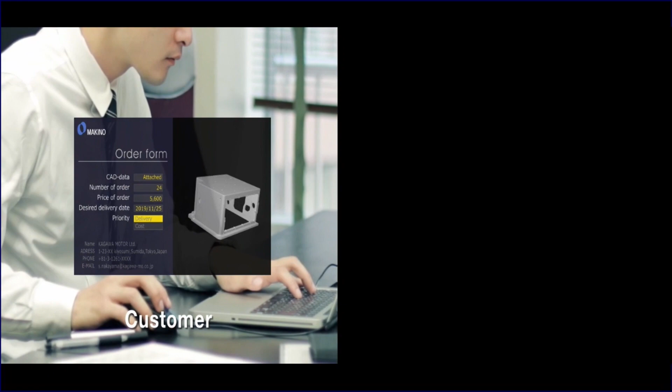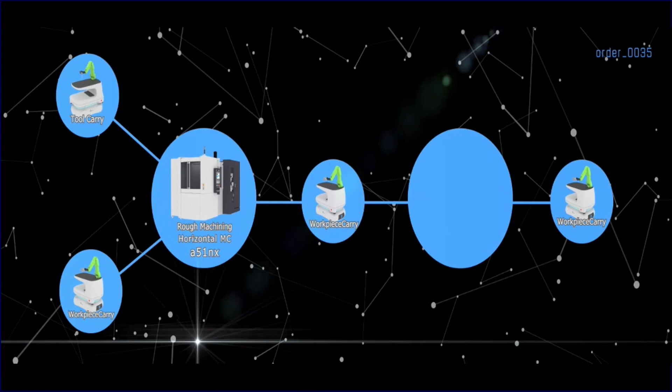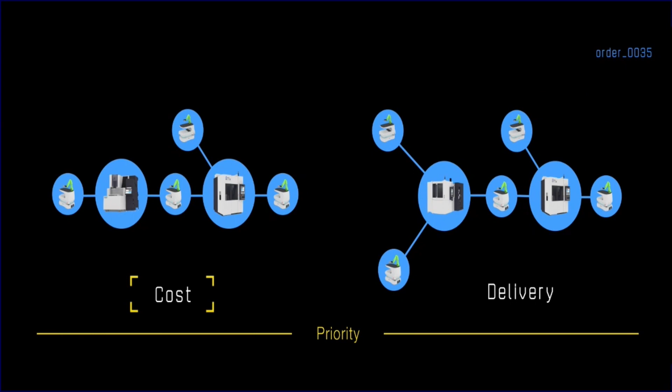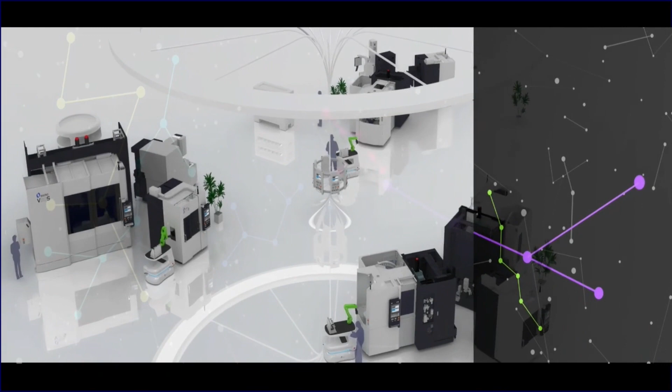So, what can Makino suggest to improve efficiency in your facility? This is our suggestion. The system alters the daily schedule in real time to maximize the factory's overall capacity. You may think this is futuristic, but artificial intelligence changes and analyzes the schedule and chooses the best production method one by one.

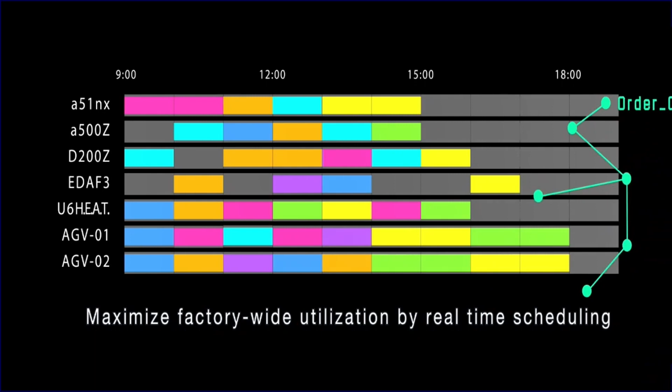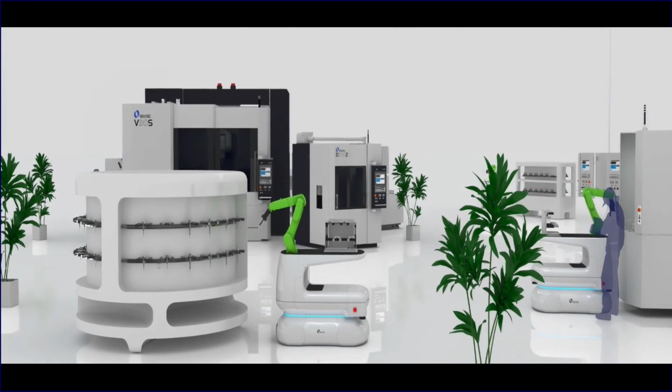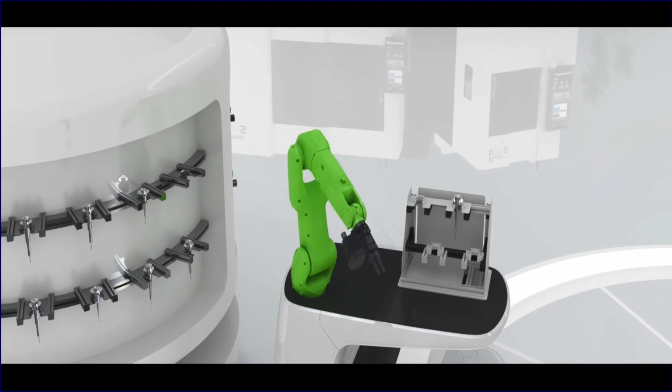For example, after the production system chooses the best way of manufacturing, the robot with AGV chooses the best tool from the tool database, then automatically puts these tools into the machining center. Such simple labor is replaced from human to robot. Not only tools, but workpieces are also delivered by this AGV.

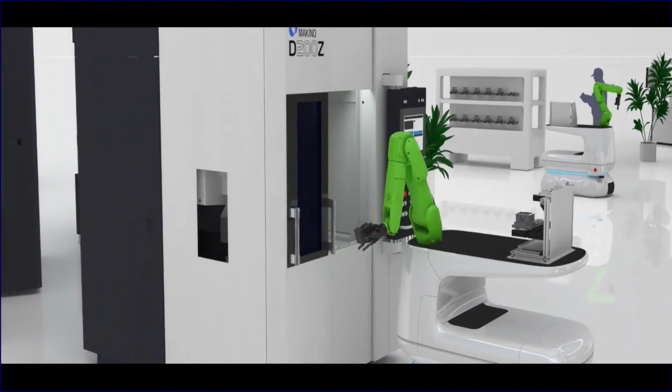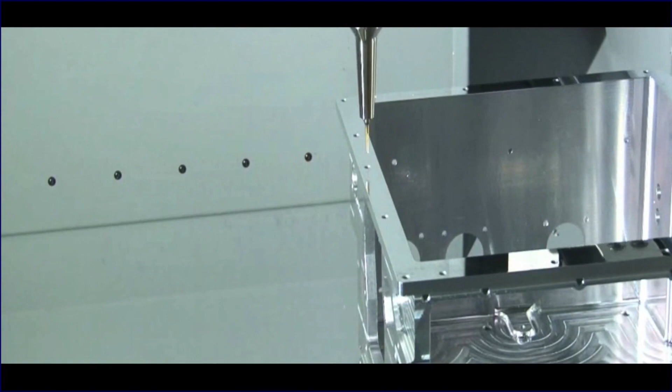If you have old machines which do not have an automation door, do not worry about that. The robot opens the manual door, then sets up the workpiece. We recommend using 5-axis machining instead of 3, because single chucking solves every machining step in the process.

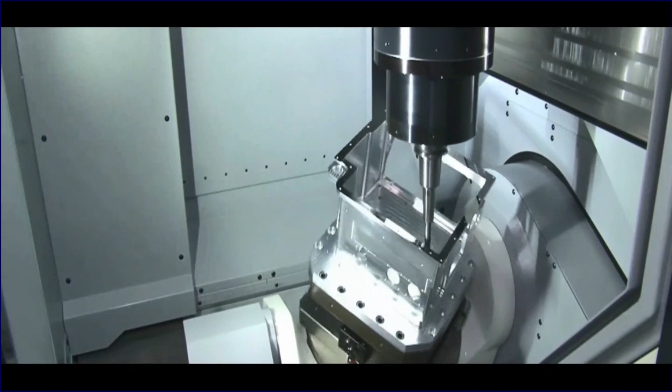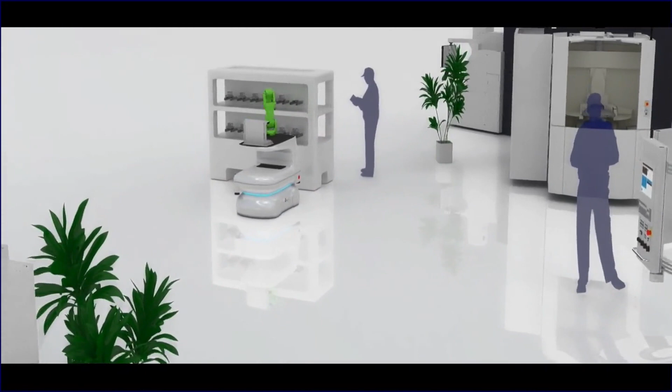This is Makino's target and future of production maximization. We are working day and night to introduce this system to customers. The system is not released yet. However, we keep working to meet the customer's demands. That sounds like a very futuristic and vast theme, but this is the Makino MES concept, a production system against understaffing.

Here is the second theme, automation. I made a subtitle: Inside Machine Measurement Enables Consistent Long Time and Precise Machining. The most important point of automation is not introducing robots and AGVs. The important point is that the machine itself can detect when the machining is properly done.

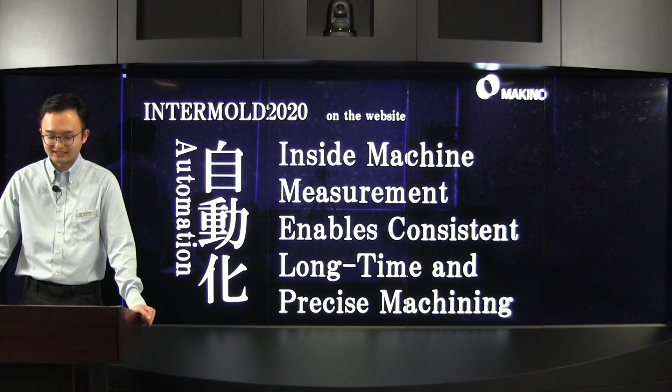So I would like to explain milling operation, sinker EDM operation, and wire EDM operation. For these three machining types, I'll show how Makino suggests the method of inside machine measurement. First is milling operation.

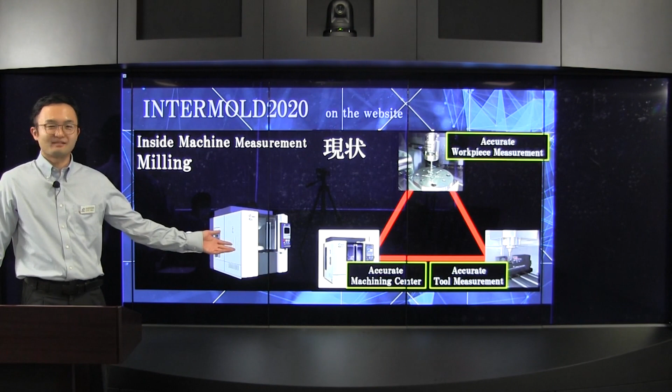This is the iQ500 micro machining center. This is a very accurate machine, able to achieve plus minus 1 micrometer accuracy. Not only the machine, but also a workpiece measurement system and tool measurement system are provided as options to secure the machine's accuracy. However, there is a problem.

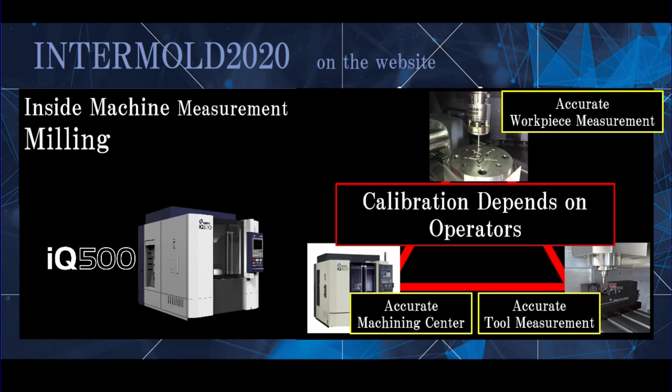All these three machines and devices' calibration depends on operator labor. So some operators may hesitate to do that, because all the responsibility for accuracy rests on the calibration. Some less skilled operators don't even know what calibration is. So we are thinking about how we can automate this calibration.

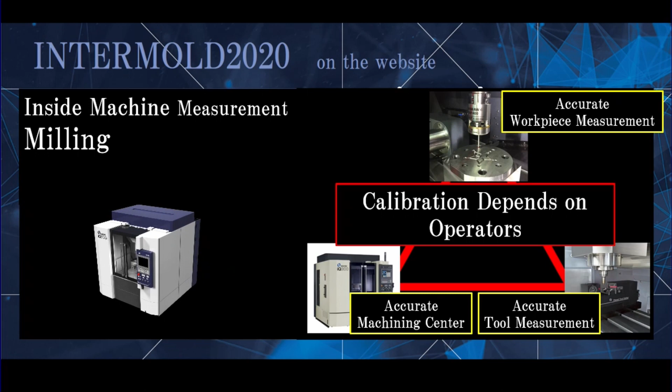Here is the automation of calibration. You can see the sphere is attached on the table, and a sphere is attached to the sensor to detect where the center of the workpiece measuring probe is.

As I said before, some operators may hesitate to do the calibration because it takes lots of time and skill to achieve high accuracy. However, Makino developed software and hardware which enables calibration of all the devices with a single button press.

But calibration is a very necessary step to achieve plus minus 1 micrometer accuracy. So it should not depend on the operator's skill. Therefore, Makino developed its own technology to automate this process.

Now the machine changes the tool. Then the tool measurement device detects the center point of the tool. Therefore, the machine can detect where the center point of the tool is, to achieve plus minus 1 micrometer accuracy.

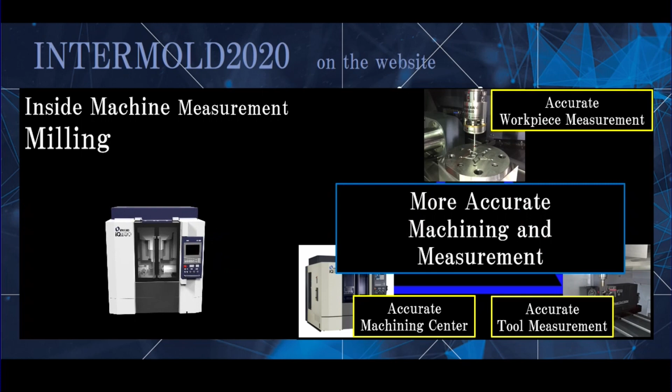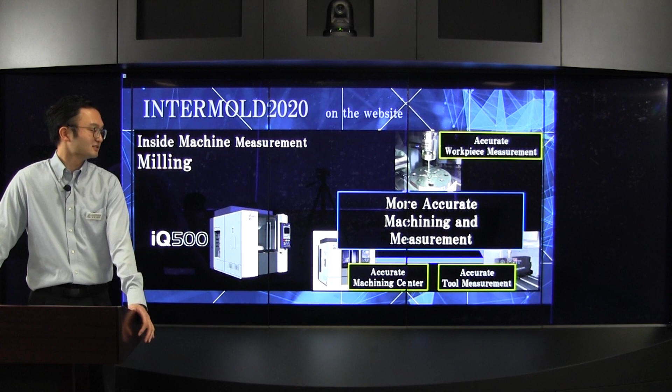Now you can see this blue triangle. After automating the calibration of the workpiece measurement device and tool measurement device, it enhances and extends the performance of accurate machining center. So you can realize more accurate machining and measurement.

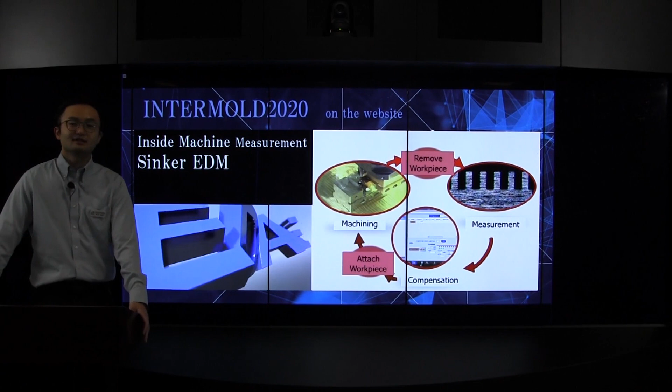The next one is sinker EDM. This is our small sinker EDM, EDAF3. Especially this machine is popular for the connector die industry, which requires very severe pitch accuracy.

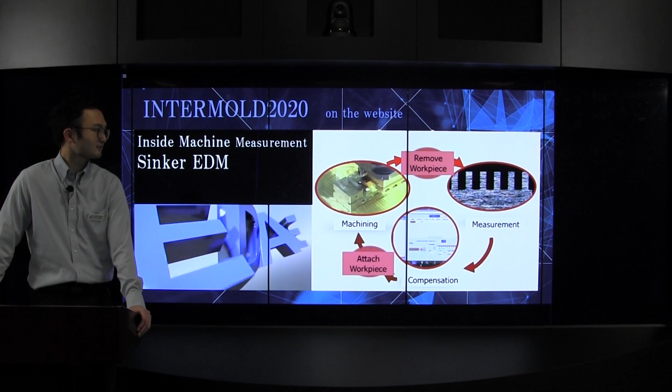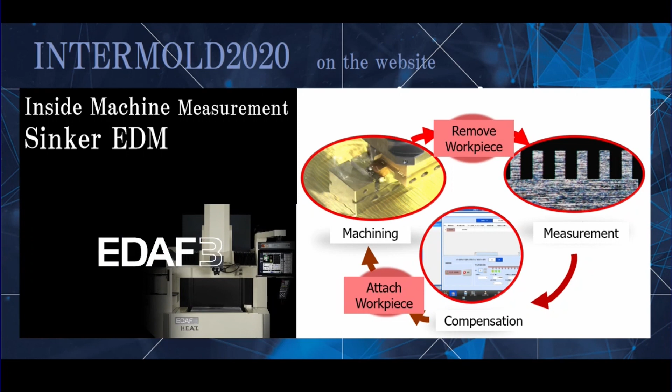However, this machine has a problem. After machining, before the final finishing of 5 micrometer depth, the operator stops the machining, removes the workpiece, then measures how much more to machine. Then adjusts the arcing setting depending on the operator's skill, then resets the workpiece, then machines again. After repeating this cycle, it takes lots of time, and the skill depends on the operator.

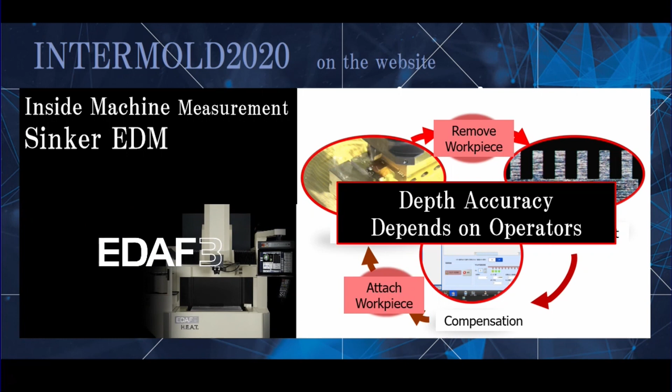So how can we realize consistent depth accuracy?

This demonstration shows how Makino's machine detects the depth accuracy.

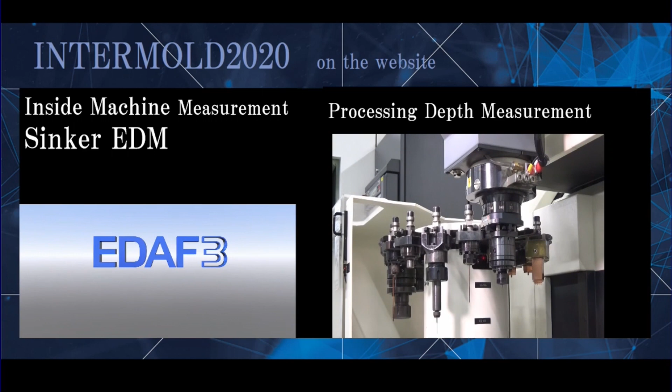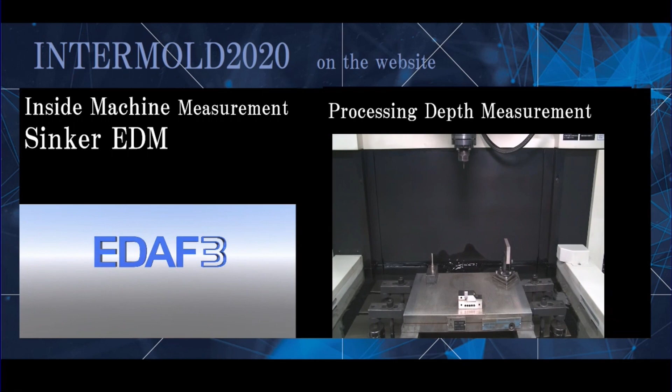For example, the connector die only has 0.3 or 0.5 millimeter pitch on each peak of the mold. Therefore, the machine forms the probe by itself.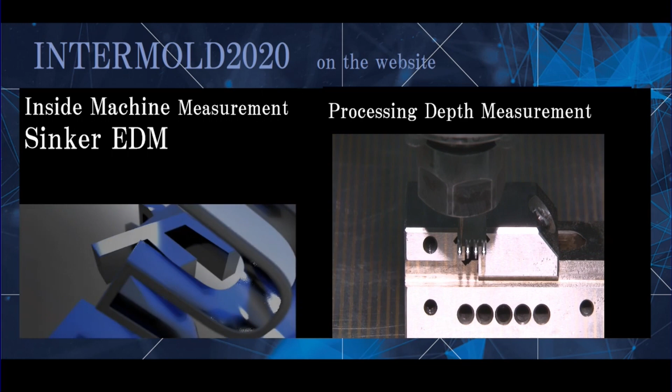You can see that this probe is approaching the workpiece. It is a very, very small diameter probe. Because this is sinker EDM, it is not necessary to be physically contacted to the workpiece. If there is physical contact, the probe easily breaks off.

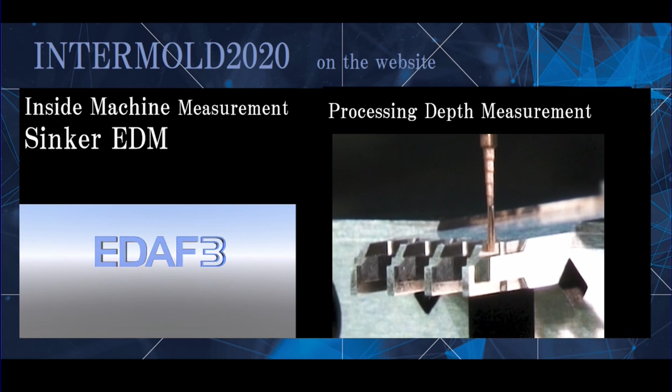Once the machine detects the conducting of electricity, the machine automatically detects how much depth is left to reach perfect condition.

After detecting how much to be machined, Makino has experience with slight additional machining. So if 5 microns or 3 microns are left, the machine automatically detects the value, then optimizes the setting to make this additional machining.

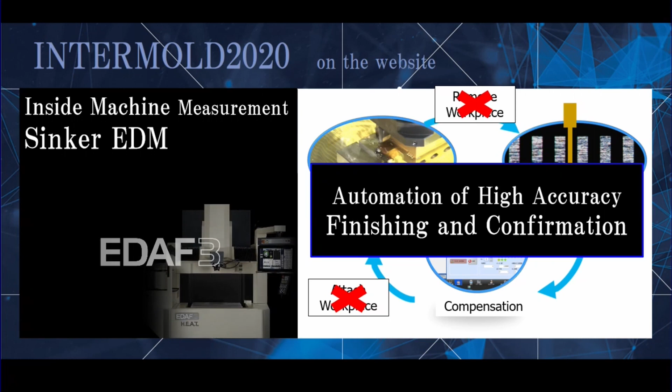So you do not have to remove the workpiece one by one, and you can leave the final machining to this sinker EDM. Therefore, automation of high accuracy is realized. Then the machine automatically confirms whether the workpiece machining is done or not.

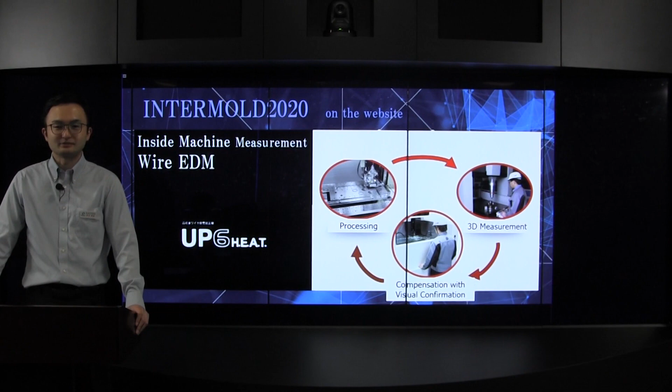Finally, I would like to explain about the wire EDM machine. This is UP6 H.E.A.T., a very accurate machine that can aim for plus minus 1 micrometer pitch accuracy.

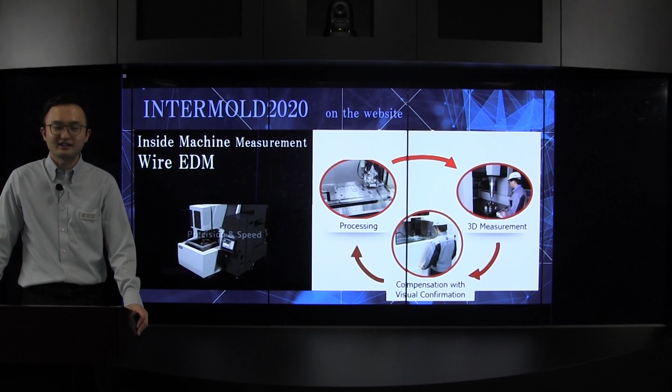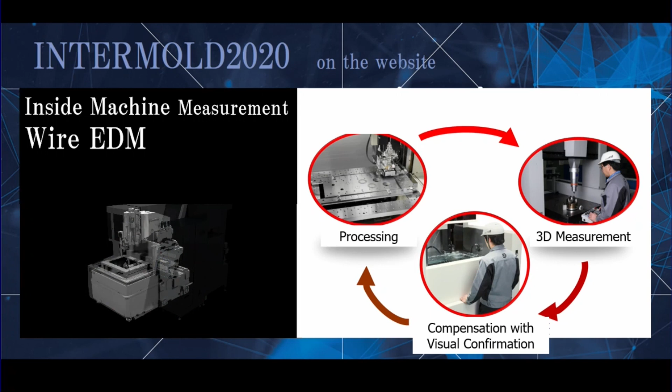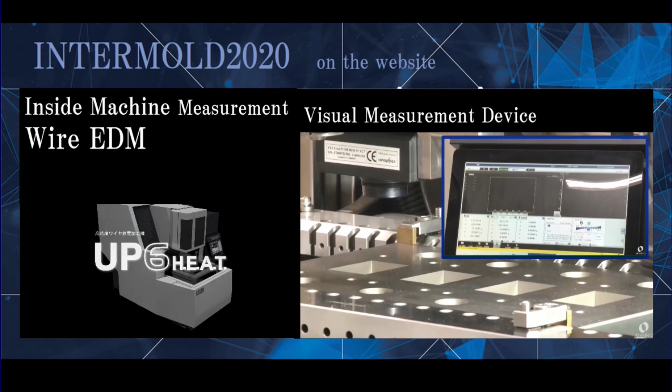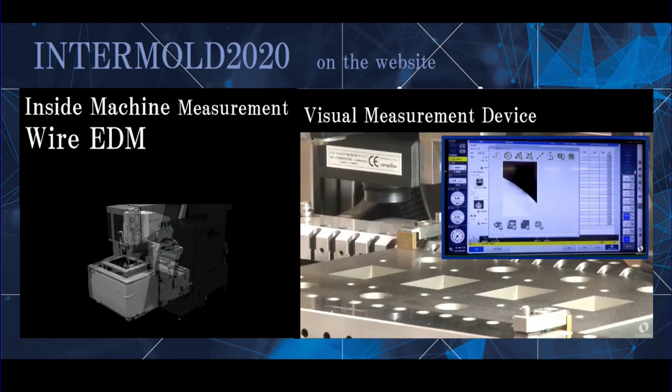So how does Makino eliminate this manual adjustment? There is a visual measurement device attached to the machine's head, and the machine head moves the same path as the machining. The reason we use a visual measurement device is that sometimes the workpiece pitch is too narrow, so the workpiece measurement probe cannot get into the space.

This is why we adopt this visual sensor, and as I said in the sinker EDM section, we have a technology of slight additional machining. So once the detection device tells there are 2 or 3 microns of additional machining needed, the machine automatically adjusts the condition, then does the rest of the job.

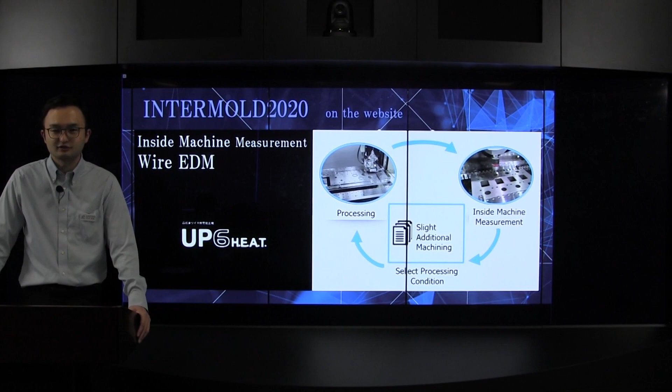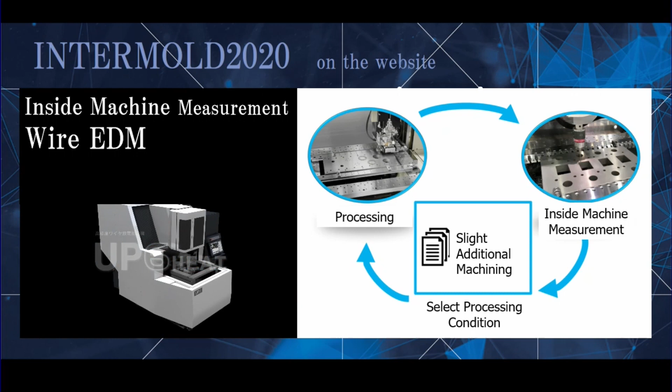So here is the cycle. You do not have to remove the workpiece from the machine. Inside the machine measurement, on the picture there is a probe, so you can select whether to use the visual image sensor or the physical contact probe. Then, after detecting how much more needs to be machined, the machine automatically selects the best condition to make slight additional machining, then finish the workpiece.

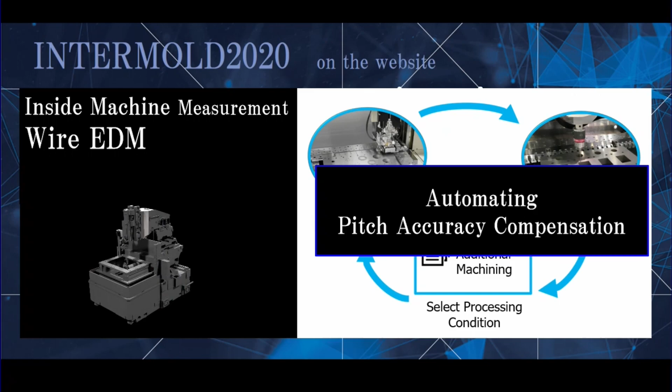So I introduced the automation of 3 machines in terms of inside machine measurement.

I would like to introduce the last theme, facilitation. No matter how we introduce the automation system, the final user of the machine is human. So we always think about how we can make easy and friendly machines and technology as a mold-making tool.

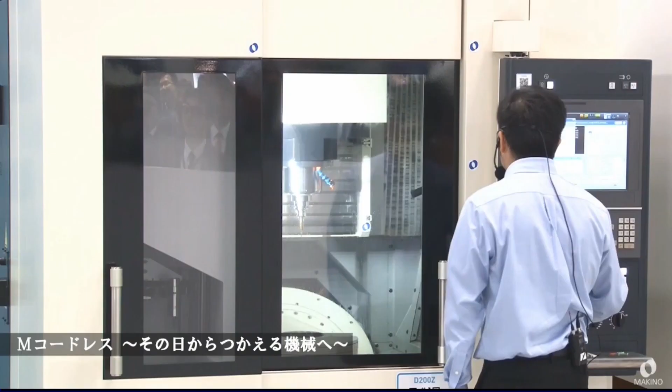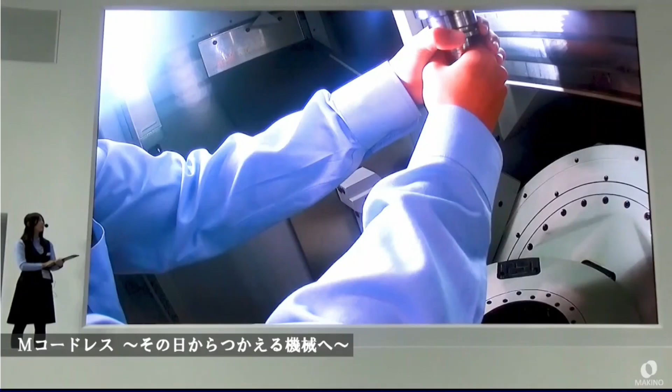This is our latest technology called Athena. You can see the demonstration of voice control. The operator tells the machine to unclamp the tool. Then the machine unclamps the tool.

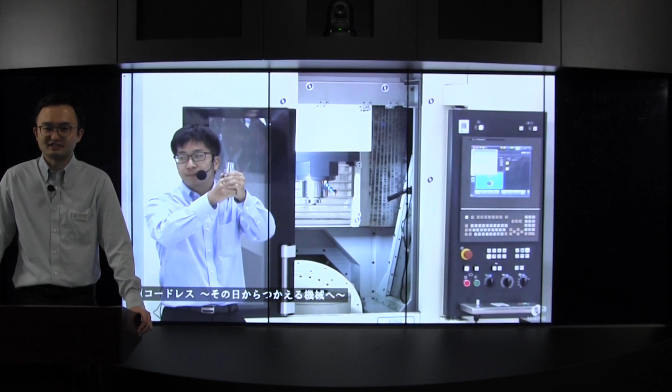Even if the operator's hands are both occupied, you can manipulate the machine with voice. Not only voice commands, but Athena also tells the operator which items need to be set up. Especially for beginner operators, it is much easier to manipulate the job before pressing the start button.

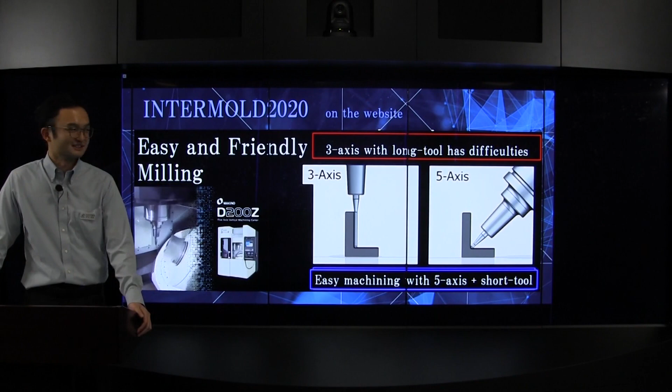Next is the 5-axis technology. There are lots of difficulties with 3-axis machining. The tool can be very long in this case, and the surface finish will be bad because of chattering, and also tool life becomes very short. So we recommend using the 5-axis machine, which can tilt the tool to realize better surface quality.

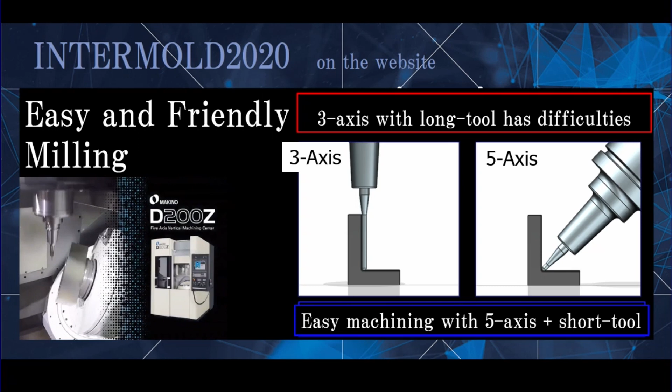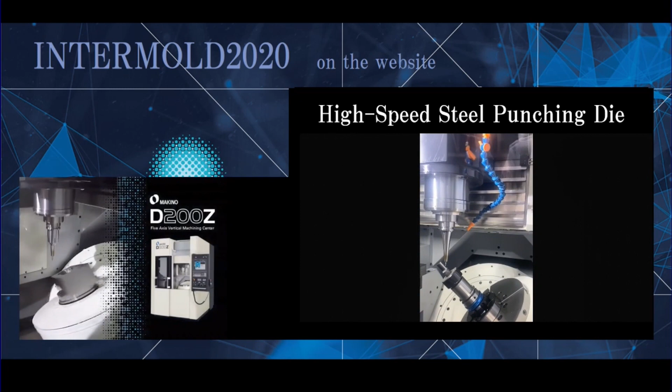Also, the 5-axis machining makes your job easier. For example, this is the video of D200Z, our vertical 5-axis machining center. What the machine is making is a high-speed steel punching die.

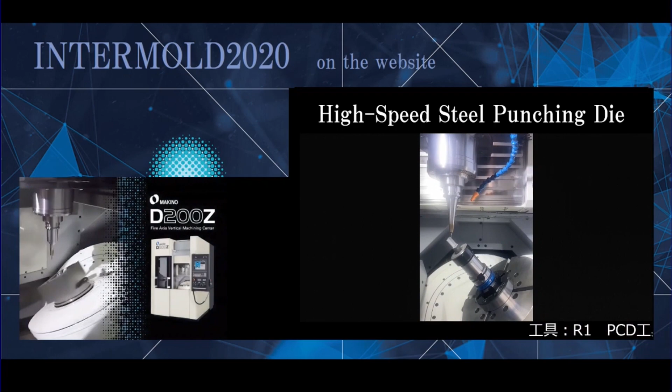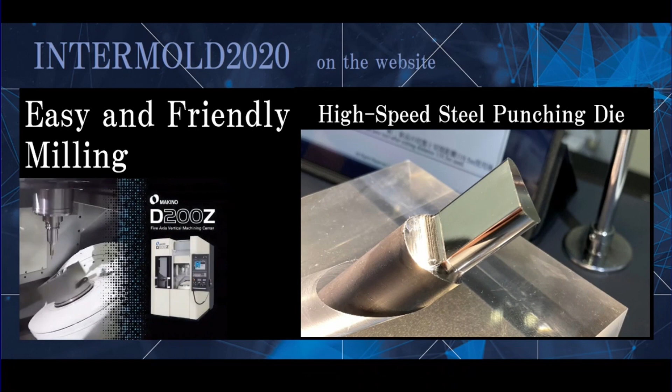The workpiece is 60 HRC, and the workpiece size is 20 by 100 mm. The tool is a PCD tool, sintered diamond. This combination realizes a very beautiful mirror surface finishing on the punching die.

It is almost a joke to make the same workpiece with 3 axes. So 5-axis machining expands your possibility on the job.

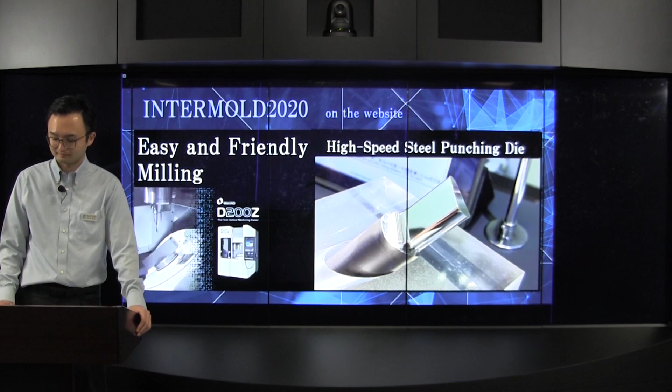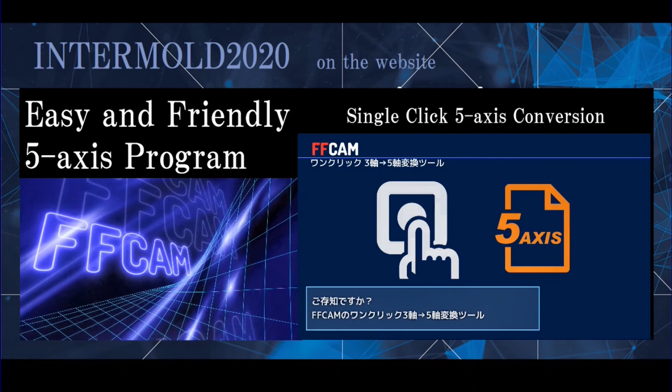So you may think 5-axis machining is difficult. The most difficult point is making the program, I think. You have to avoid the collision of workpiece and machine, and also the 5-axis programming needs more experience to make.

We have a solution. This is FFCAM, the Makino-developed CAM software. It automatically converts the program from 3-axis to 5-axis with a single button press. So you can utilize your existing 3-axis program into a 5-axis program, then introduce it to the 5-axis machine.

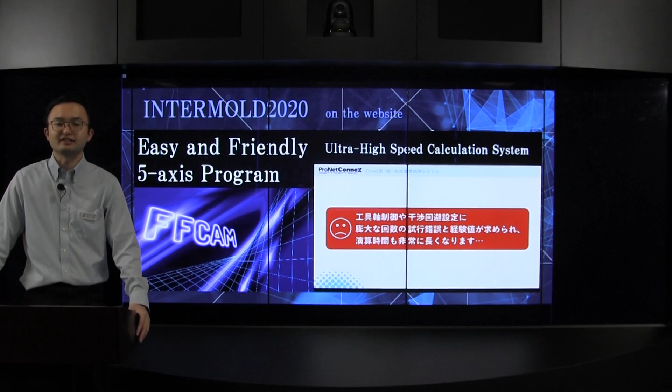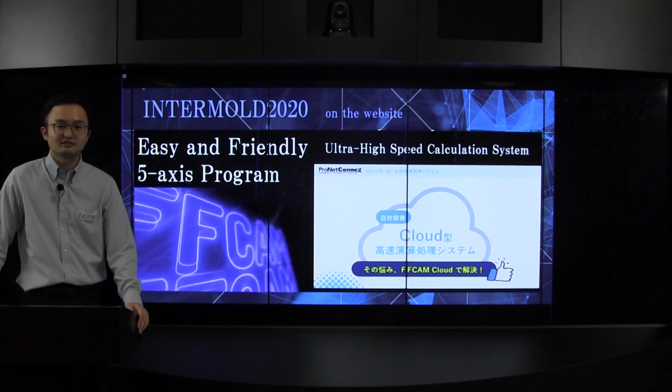Also, the biggest concern is taking time on the calculation. Makino's FFCAM has a solution for this. We have an ultra high-speed calculation system utilizing the cloud server for calculation.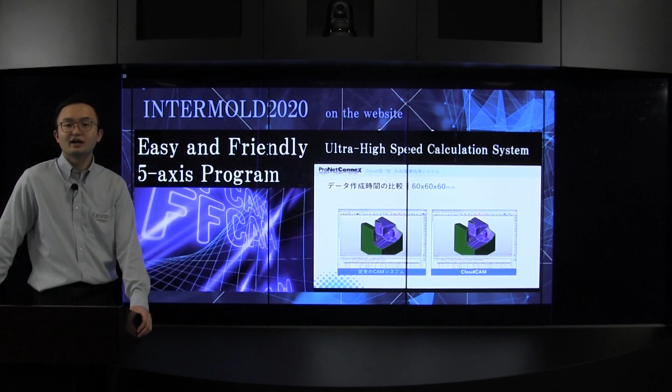So there is a comparison between the conventional calculation and cloud CAM calculation. Once the data is uploaded on the cloud server, the supercomputer processes the path conversion.

It is uploading the data and converting the program to the 5-axis right now. Then downloading the data from the cloud server. So it only takes 2 minutes.

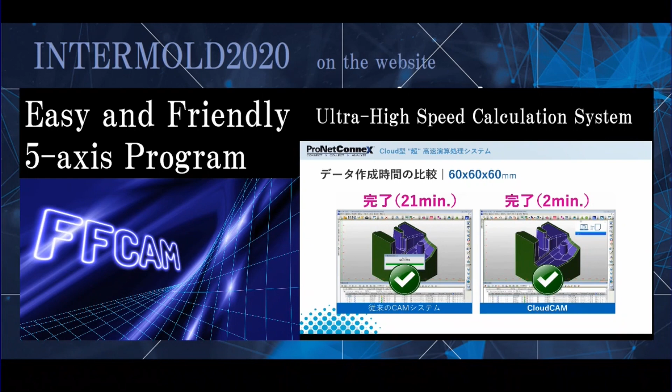So you can do trial and error as much as you want. On the other hand, the conventional method takes more time. Let's see how much it takes. 21 minutes. That means this ultra high-speed calculation system is 10 times faster than your computer's calculation.

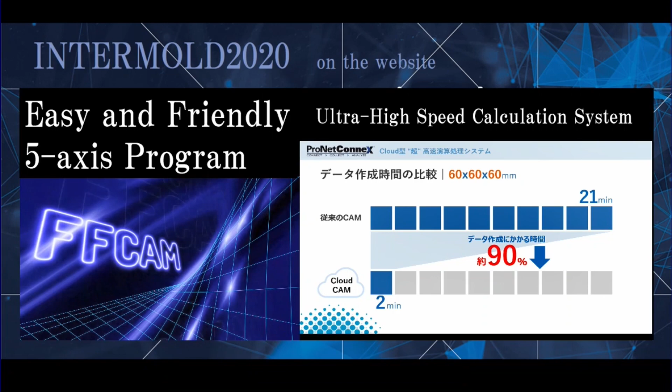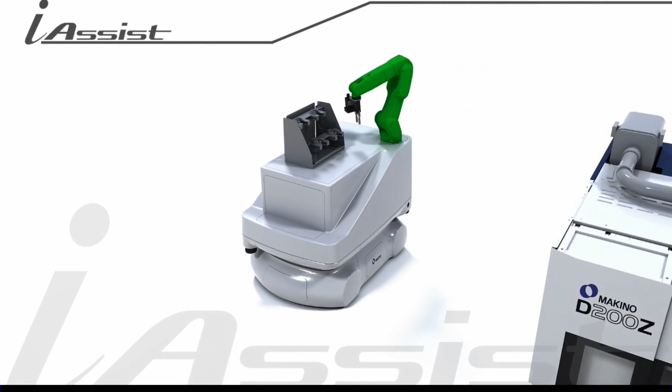At last, I would like to introduce the teaching-less automation system, iAssist. On our previous exhibitions, you may have seen some demonstration, but let me introduce it. So this is the iAssist overview.

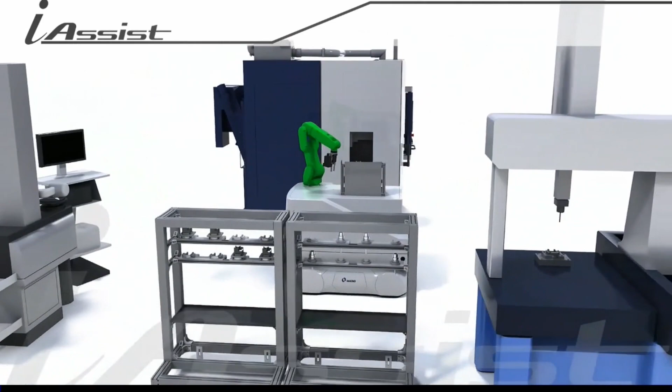We connect the machining center, tool presetter, and 3D measurement device. This robot is a cooperative robot which does not require a safety fence, and this is the automated guided vehicle, AGV.

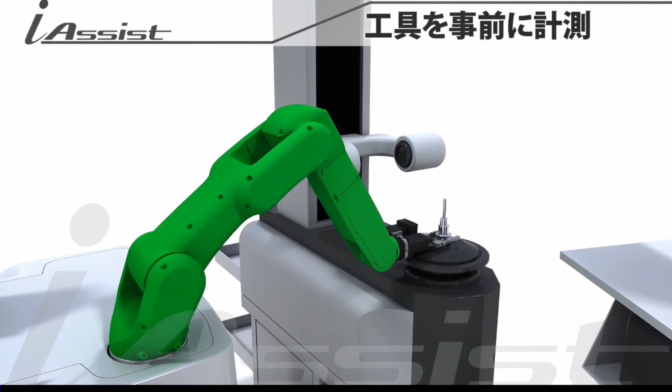You do not have to make teaching. The only thing to indicate is move from point A to point B. After measuring the tool, the robot picks up the tool, then delivers it to the machining center. So this simple labor is replaced from the human to this robot and AGV, iAssist.

So this AGV has a radar to detect what is in front of the vehicle. Once the system detects a human or obstacle, it automatically avoids these obstacles and makes its way.

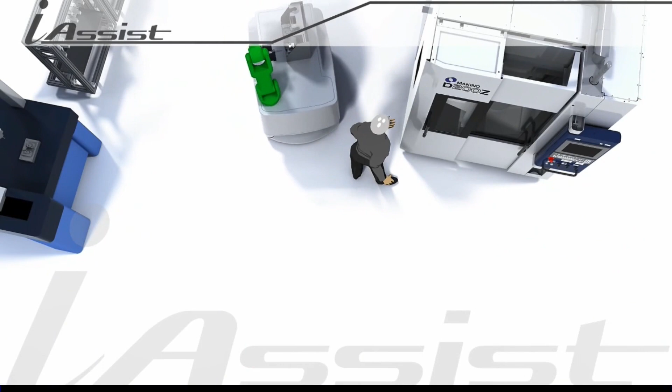So such a complex system needs a very high skill of integration. However, they think by themselves. They are autonomous. So you do not have to spend such time, and you don't have to pay for an integrator to introduce this system.

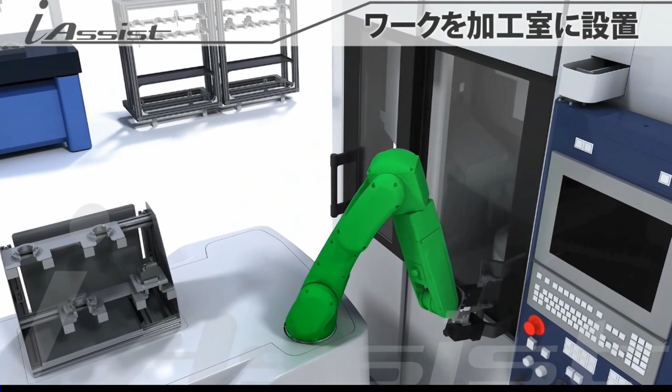As you can see in the first video, the robot opens the manual door, what the operator usually does. That means you can integrate the old, existing machine into this iAssist system.

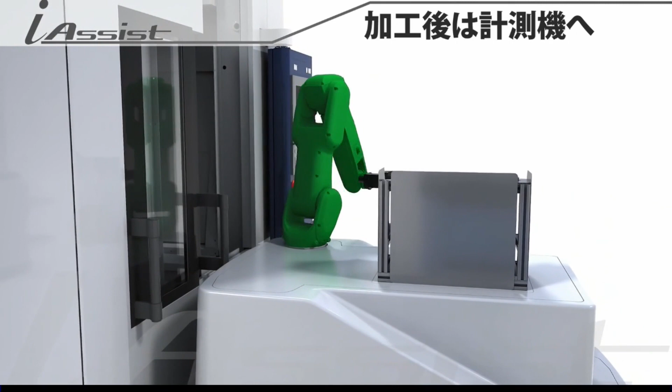No matter if the machine has an automation door or not, this AGV and robot automate the workpiece setting. After the machining, this robot picks up the workpiece, then delivers it to the 3D measurement machine.

As I said before, the key point of automation is confirmation of the result. If the system sees the workpiece is completed, it will be fine. But if it is not, iAssist picks up the workpiece, then sets it up on the machining center and repeats the cycle without human intervention.

So this was the third theme: facilitation, easy and friendly mold making tools. So I introduced three themes: Makino MES concept, automation, and facilitation.

Also, we are going to exhibit ultra-efficient wire processing, U6 H.E.A.T.. What the ultra-efficient wire processing is, we adopt a 0.4 millimeter diameter wire.

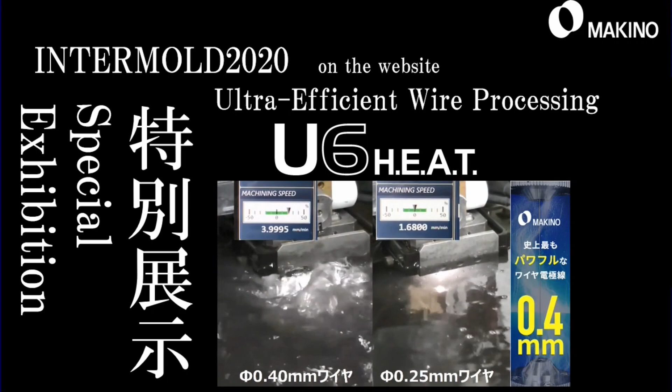The conventional wire thickness is 0.25. However, this 0.4 millimeter can cut twice as fast as the conventional wire.

No other wire EDM competitor adopts this 0.4 because the wire is too thick and hard to feed inside the machine. But we developed new technology to enable the use of 0.4 millimeter wire.

For example, you can see the comparison. The 0.4 millimeter wire only takes 100 seconds to cut the workpiece. On the other hand, the 0.25 millimeter wire takes 200 seconds.

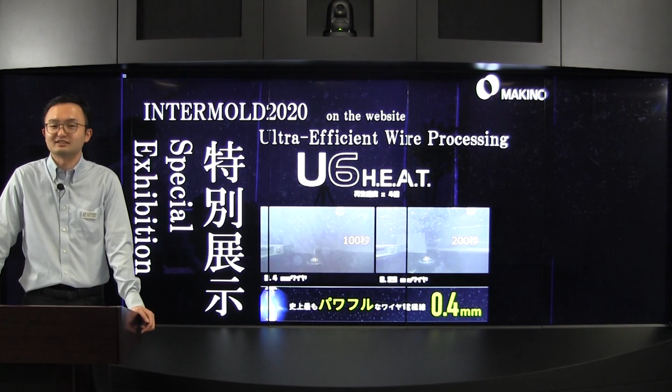You can see the 200 seconds to cut the workpiece. That means this 0.4 millimeter wire is twice as efficient as the conventional wire.